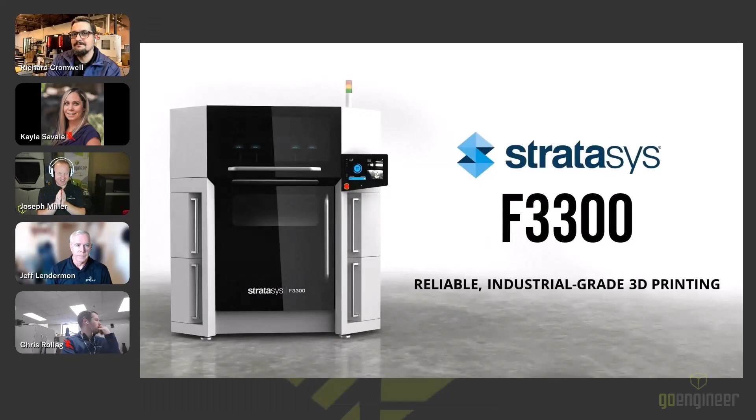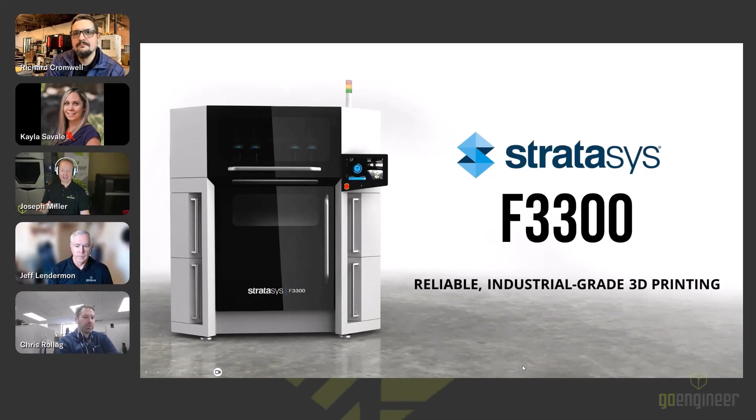All right, good. So here is the F3300. It is a beautiful machine. I just think that they did a great job with the design of this system. And the best part is it is made for speed, and we'll get into that.

First, a quick introduction. I am Joseph Miller, application engineer out of Atlanta. I've been working with Stratasys 3D printers for 15 years now, and they're still just so much fun to play with. We also have Jeff Lendermon, a simulation specialist with GoEngineer as well. Before he was with GoEngineer, he worked with injection molding for 30 years. So a great source for manufacturing experience.

Richard Cromwell, my fellow application engineer, he worked with custom manufacturing and repair of pianos, Steinway pianos, right, Richard? Yeah, that's correct. Yeah, for a lot of years, and then joined GoEngineer. Yep. So very, very cool stuff there.

And our special guest, Chris Rollag from Stratasys, who is the product manager of the F3300. Before Stratasys, he worked with composite materials in spaces like aerospace and automotive. So we've got a lot of good experience here to speak to this new product and how we can use it and other additive manufacturing tools in the manufacturing space.

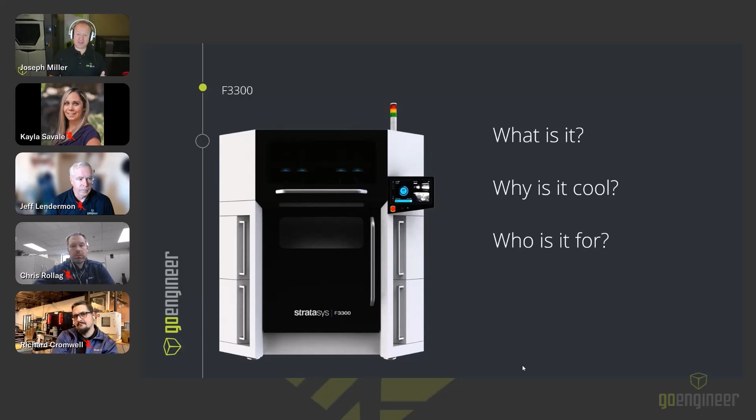All right, into the meat of it, the F3300. What is it? Why is it cool? And who is it for? This is so fun. They did so many changes for this. First up, what is the F3300? Well, it is a regular FDM printer, I say regular, they've actually made quite a few changes. The first is they're going more metric, and in my mind, when we're dealing in accuracy counts of microns, metric is kind of the standard we should be in anyways.

So the F3300 has a build area of 600 by 600 by 800 millimeters. And for those of us who are still working on our mental calculations on converting that, it's about 23 and a half by 23 and a half by 31 and a half inches, really close to that. So it's a good size printer.

It's going to start with 4 materials. They say start with, so I imagine more are coming, just not available yet. And those will be ASA, polycarbonate, nylon 12CF, and Ultem 9085. These are the most common, most used manufacturing type materials. That's why they started with those. The soluble and breakaway supports will be material dependent, whichever materials can use whichever support options available.

So on the surface, an FDM printer, but they made a lot of really cool changes. And I'm just getting to know it myself. I have not yet seen one. I'm really excited to, but let's go through some of the new features.

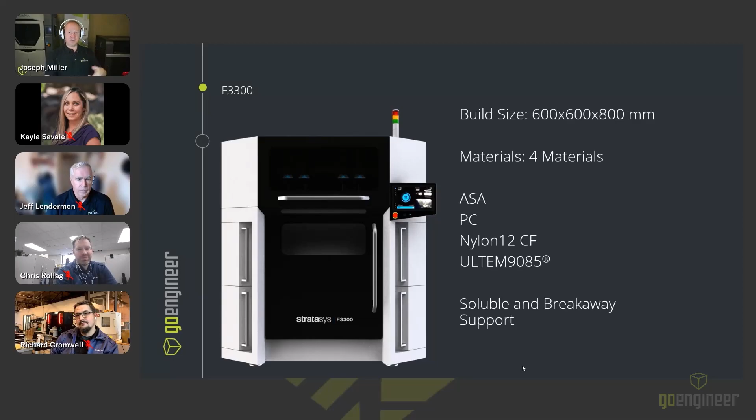Why is it cool? Well, first, it's up to 2 times faster. We're going to touch on some of the reasons that it is faster. One of the more important reasons, I think, is even the reliability increases over the Fortus 450s and Fortus 900s. Reliability and repeatability are super important in manufacturing, so getting these types of figures for this printer is really speaking highly to its proposed use.

Up to 45% lower cost per part. That's huge. A lot of figures go into that number, but one of them is just the ease of use that it has with this. A lot lower operator costs, and there's a lot less hands-on time with it.

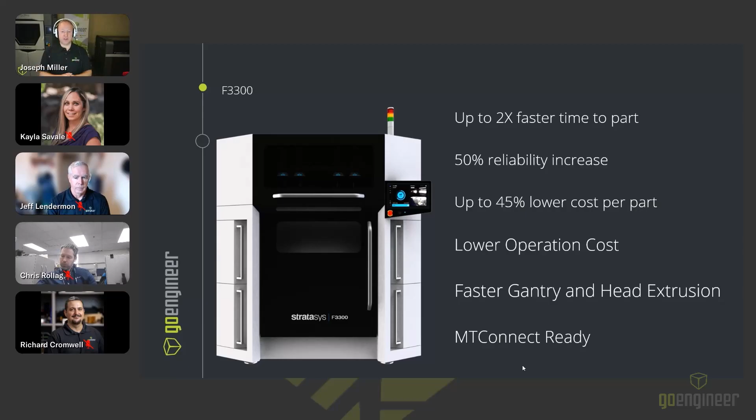The upper section of the printer is an all-new gantry system based off of high-end CNC linear rails, components, and gear systems. It's all new and able to move faster. There's even connection for MTConnect for all of the data, especially if you're creating end-use parts that you have to track and keep records of the manufacturing process. All of those things are built into it.

Here's the biggest time saver on this: the auto calibration. I'm really excited about that. I've changed tips hundreds or thousands of times on the Fortus printers, and it can take some time. It's not a big deal when you do it a lot, but when we're talking time is money, auto calibration is really cool.

There's no auto change errors. The way they worked out the system is going to take one material to one head, so you don't have to swap back and forth going to the same extruding point. So auto changeover errors are not going to be an issue.

Onboard material dryers - this is really big. You can not worry so much about the material you're putting into it. Lower cost, larger spools too. The old spools for the Fortus systems were 92 cubic inches. These are 4,100 cubic centimeters - let's convert that to give a direct comparison - that's 250 cubic inches, more than double. So that's going to lower the cost of each of the spools of material.

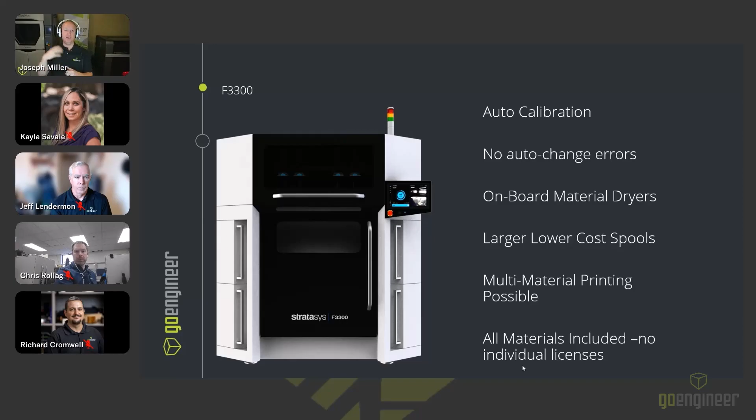Multi-material printing is possible with the individual print heads to individual materials. We'll see some closer pictures of that in a second. I think that's just awesome. All materials will be included with the purchase of the printer - there's not individual material licenses for it. Very, very neat. Here is, at least from my experience so far, the real heart of improvements.

At least the visible ones to the F3300 is this new extruder design. It's a modular system, so you have the hot end or the tip if you're used to the Fortus machines, the extruder assembly, which would be the main drive gears for the head, and then a head bracket assembly. They based it off of automatic tool changing systems like in high-end CNC machines. So you can now just put together the head combination you need for a material, slap it in there, and then the printer itself will actually go and grab each tool head and use it as needed. Just a really neat design.

Because of this, there's also one head per one spool of material. So you can load up even 3 model materials to 1 support material, something you couldn't do before on the Fortus printers. You can have different colors of the ASA to print multicolor objects. You can use different types of materials as long as they're the same temperature profile. But all of these things are available because of the 1 spool to 1 head setup of this. I think it's just awesome.

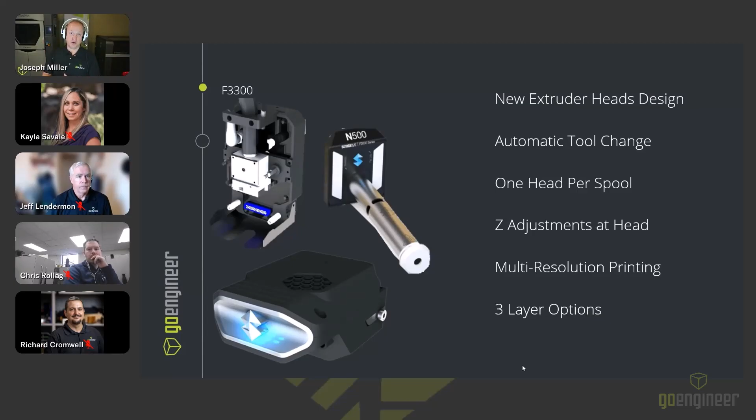It's very awesome. Multi-resolution printing, again, with the head being able to translate in Z as well. There are 3 layer options, including a newer one that so far has only been available on the 900, the 20 thousandths layer thickness. Here's a closer in image of this head, the upper portion of it with the heads.

So you put in your hot end, you put it into the extruder, you put the extruder into the cradle, and then the printer will come and grab the tool it needs for each part of printing as it needs it.

The documentation I've been reading for this printer compares the Fortus printers at about a 1-minute changeover from model to support, 60 seconds. The changeover from model to support material with this method is 15 seconds. That's 45 seconds saved every layer it has to change back and forth from model to support. If you're printing a couple thousand layers, that's a huge time savings. Really neat machine here.

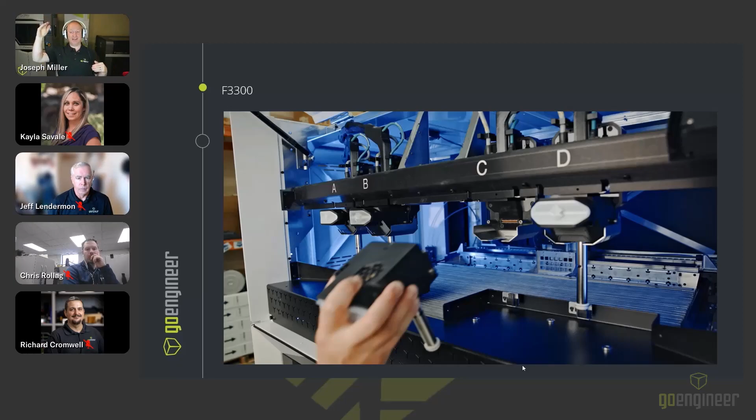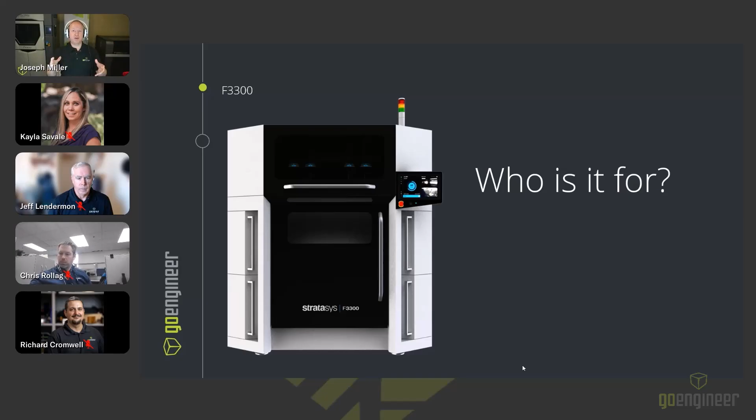Okay, who is it for? Well, first and foremost, this is designed and built around people who are making parts to use, not just prototypes. You certainly could make prototypes with it, but it's really geared around people who are making parts that are making them money, actual end-use parts.

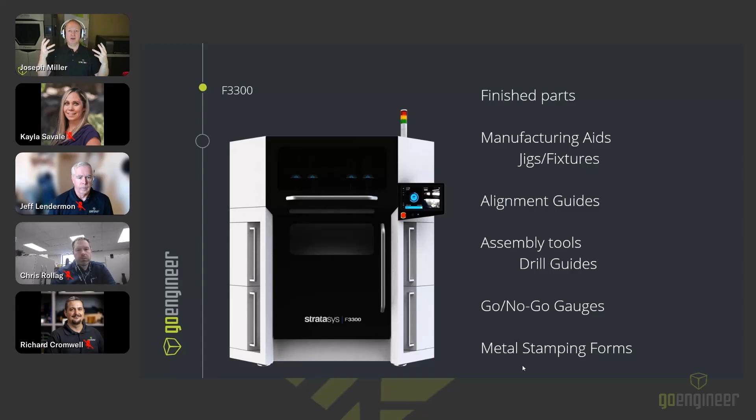Finished parts, service bureaus, whether that's finished parts or prototype parts, service bureaus can make those parts faster. Anybody who's making manufacturing aids, jigs, fixtures, alignment guides, go/no-go gauges, assemblies, component trays, all of these things are going to be able to be printed faster and at a lower cost on the F3300 compared to the older Fortus machines. Metal stamping forms, etc.

All of these types of manufacturing aids can be built and built faster. Who else is it for? Anyone who is using these parts and you need to reduce the cost of the parts. When we're talking about additive manufacturing, we're not talking about printing millions of parts. These are usually a couple hundred.

Just a simple injection molded plastic doohickey part, you can print millions of those and sell them all over. But if you're talking airline parts, you might only need 100 of that part. So keeping those costs low is very important.

High throughput, you do need a lot of parts, especially a lot of different parts. That high mix, low volume ratio, lots of different parts. It's real easy. You don't have to go and cut tools and manufacture the molds or anything to get your parts. It can just print the part.

There's data feedback that we talked about, the MTConnect. Low operator time, the automatic calibration, the quicker changeovers with the multiple heads to individual spools, larger amounts of material per spool, so there's just less hands-on interaction with it. And of course, reliable, repeatable parts. All of these are coming into the F3300.